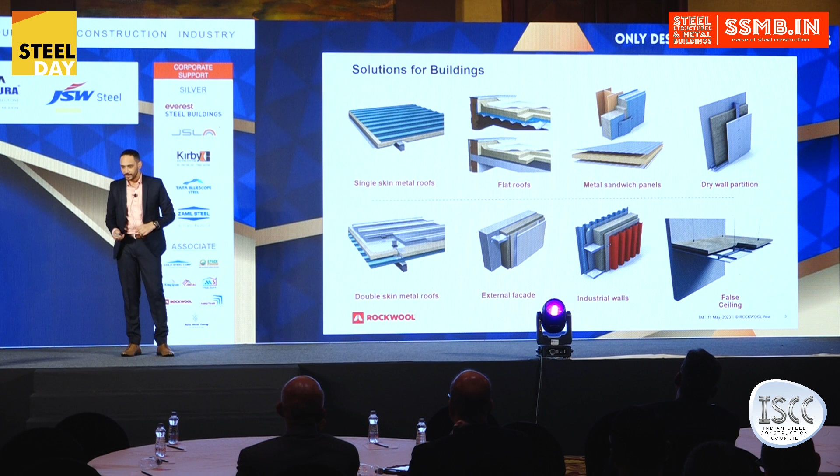Next subject, mineral wool. How to choose the mineral wool? Well, this is again one of the most confusing terms. I mean, we have read a lot of BOQs and specifications that mention mineral wool of so-and-so density and so-and-so thickness. Now let me clarify that there is no material called as mineral wool.

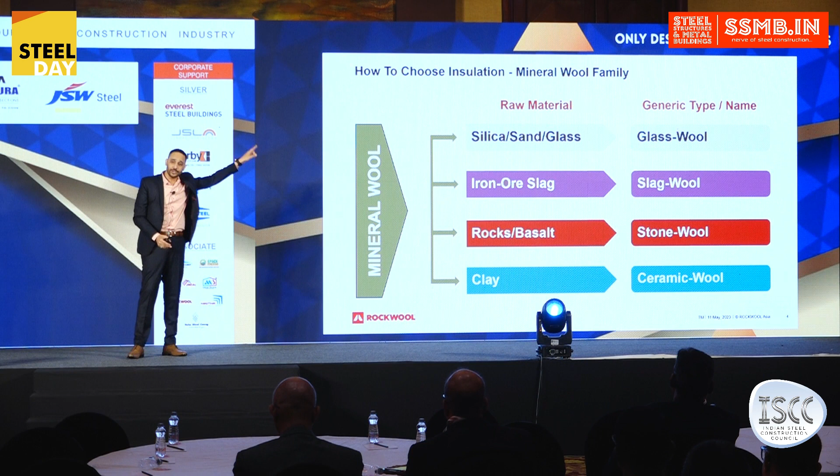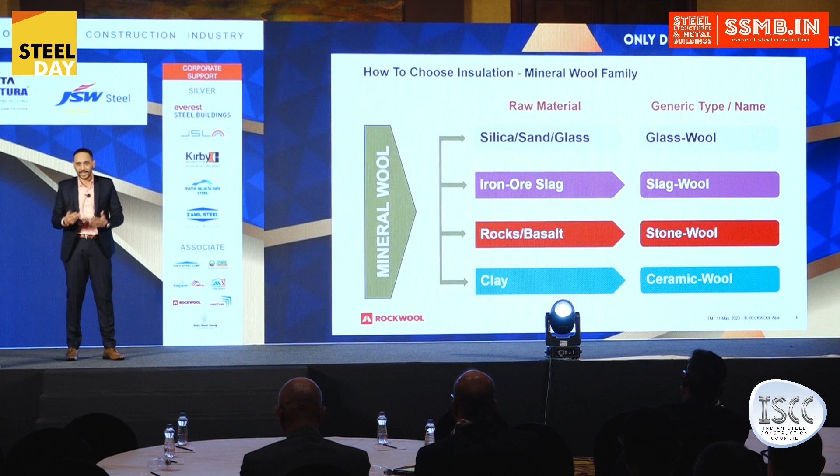And performance-wise, there is a lot of difference between a glass wool versus a slag wool versus a stone wool and so on. So it's a humble request to all the consultants, architects, and clients that whenever you are selecting or specifying insulation, please make your choice very, very clear what kind of insulation you want.

Now talking about stone wool insulation, I mentioned in the beginning that what we are essentially doing is converting the basalt rock that's coming out of a volcanic eruption into fibers. So whatever properties or strengths a basalt rock has, it is always replicated and found in our material also. Whether I'm using the material for roofing, for a partition, for a sandwich panel, or for a process industry, the basic properties of stone are always found in our material.

And that includes fire performance, acoustic performance, thermal performance. Very, very durable because it is made out of stone. Aesthetic-wise, sometimes, yes, you need that. Very, very good in terms of repellency to moisture and water. So the water absorption rate is very low, moisture absorption is practically nil. And circularity. The material is absolutely reusable.

So these are the basic 7 strengths of stone or stone wool, which are always found in our material. So next time you want to choose the insulation and you want to achieve all these parameters, then stone wool would be your ideal choice. Now, out of these 7 parameters, I'm going to highlight one particular parameter which is directly related to human health, human lives rather, and that is the fire performance.

I think practically every day when you open the newspaper, you see some news related to a fire accident, so many lives have gone away, and that's possibly because we are not using the right kind of fire-safe materials. Now, talking about fire safety, every company or every product person will come and tell you that my particular material is fire safe, I have this certificate, I have that certificate. But let's understand the real scenario of fire. What really happens in a fire?

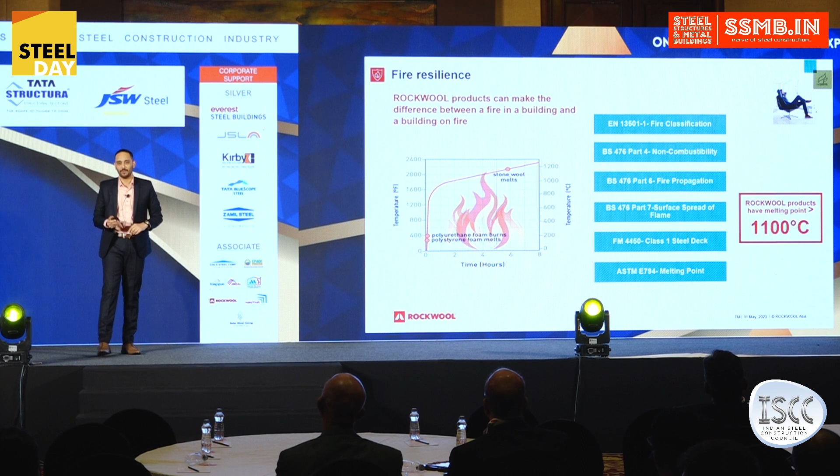Just to end with, I'm going to show a short video, and that will be the last thing for my presentation.

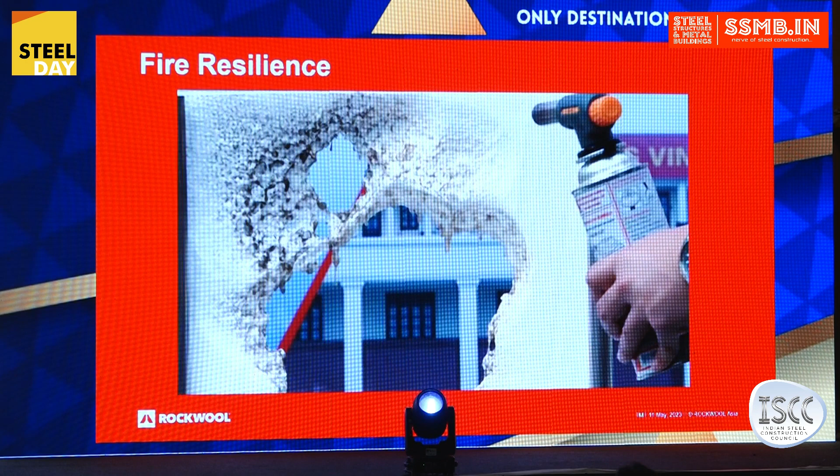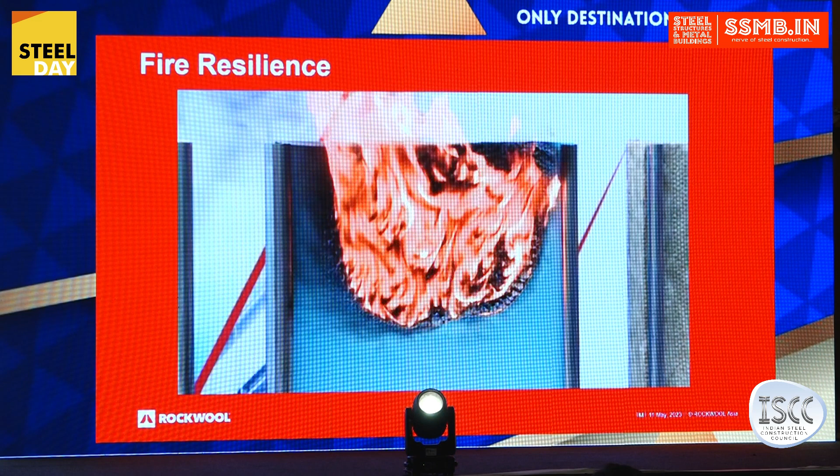That's an EPS or expanded polystyrene. Next is a polyurethane foam, PU. The last one is XPS or extruded polystyrene. That's again Rockwool. Absolutely fire safe.

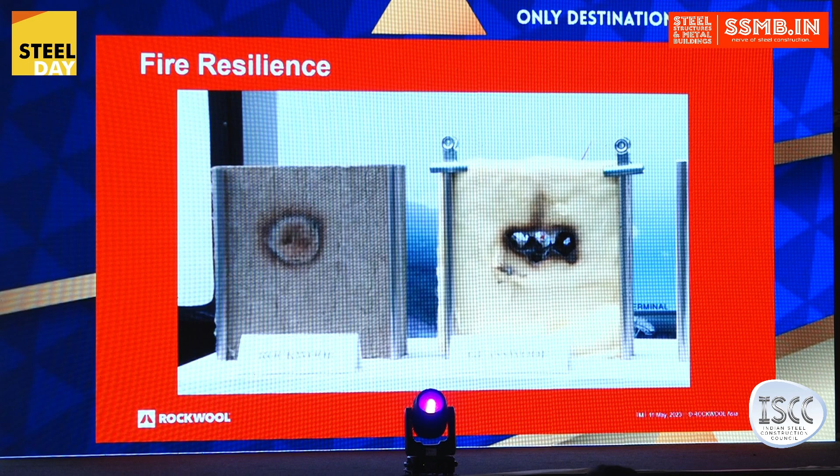Recap. Thank you so much. My concluding statement would be that there's a big difference between a fire in a building and the entire building on fire. And we can make that difference for you. So please choose your insulation wisely.